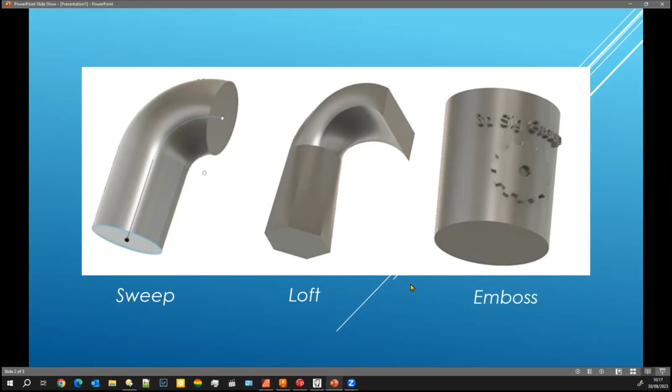We'll look at the sweep command first in Fusion - the sort of thing you'd have on a duct of a ship, or that you could use creating pipe work. The idea is we're going to create two circles, one at the bottom, one at the top, and join them together with a sweep command. We'll put the first circle on this base plane, and the second circle has to go at right angles to it.

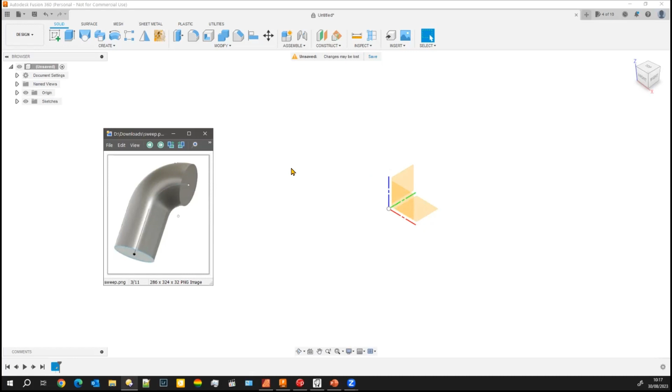Let's move back into Fusion. The first thing we'll do is put our base circle in place. I'm not worried about dimensions. Now, of course, we want this curving up that way or whatever way.

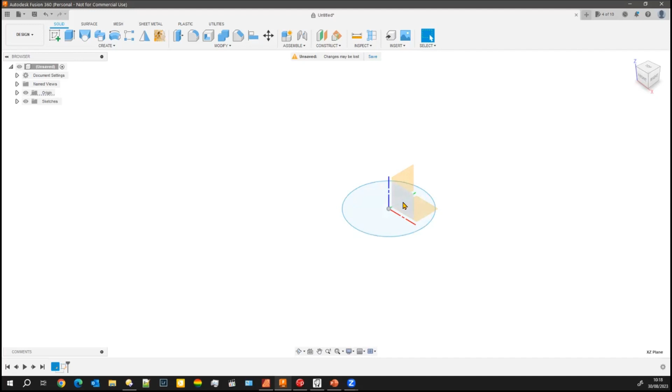So the other circle we want at right angles to this one, but we can't use this sketch plane, because if we use that plane and draw a circle somewhere on it, up there - you can see the two circles - there's no way you can then create that shape with the two circles in that position. We need that circle moved over.

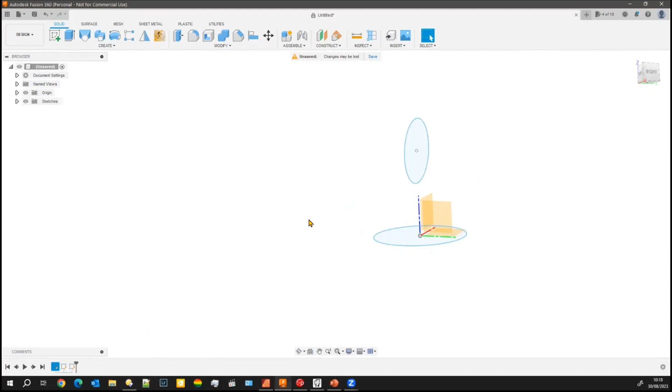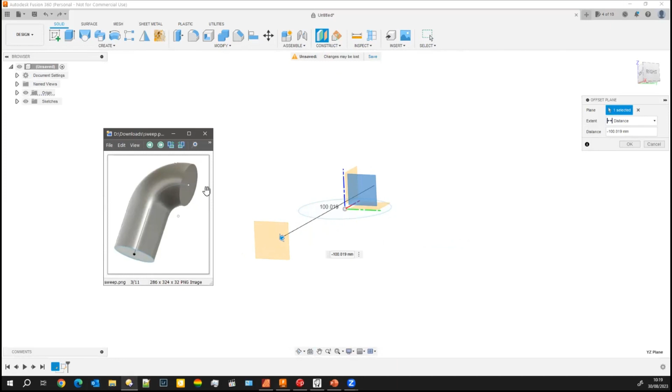So let's go back to our basic circle. What we need to do is create this other circle on a plane that comes this way - we're going to construct an offset plane, offset on that one, and pull it over here. Normally you'd need to work out the distance between this center circle's plane and where you want the edge of the new plane to be, but I'm just guessing at the moment. It's come out at 100.

Then we click return, so we've got that plane. Click on sketch, click on that plane to sketch on it, and then we can put our circle wherever we want. As I said, I'm not interested in measurements. There's our two circles. Now the question is, how do we sweep from there to there?

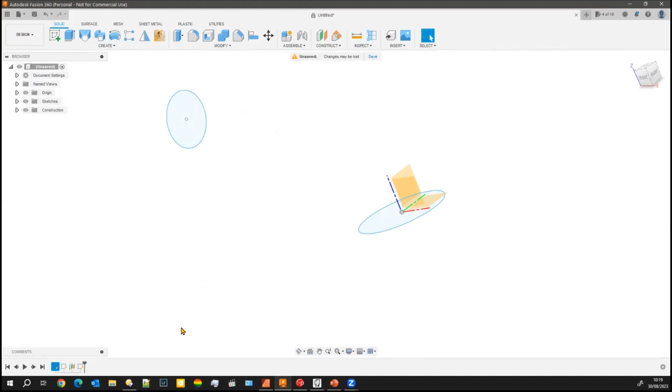What we've got to do is put a line in - the path we want to follow has to go from there up. Let me get rid of that first circle a minute, since we don't really need it at this stage. I want to sweep on a path, and the only way this can sweep is up or down, so therefore the path has to be on this plane.

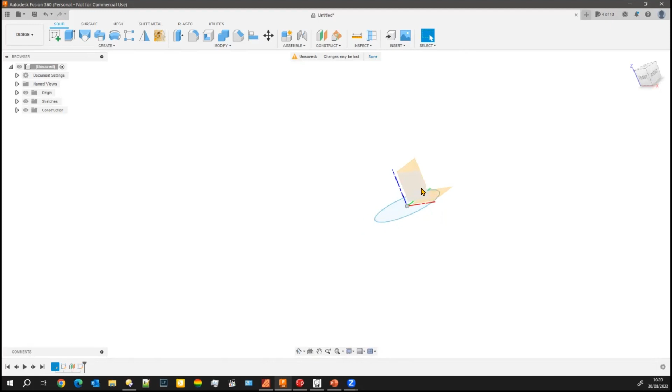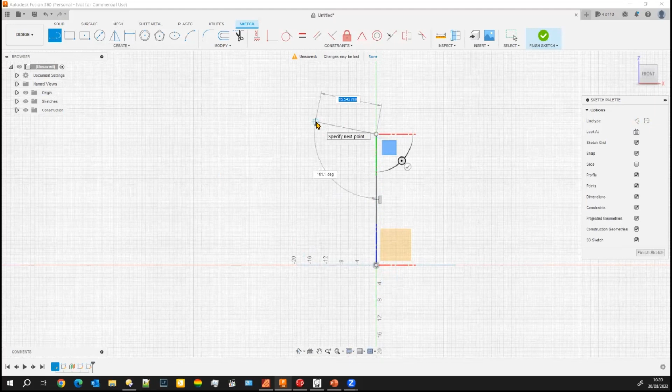Let me zoom in a bit - that one there. So we're going to go down, click on that plane, and then draw our path up. Hit the center point, that might be a good idea. And then we're going to put a curve in there maybe. Let me move my thing, otherwise I can't get the curves here.

And then we'll add a bit more to it by adding another line down here. You can have whatever shape path you want. So there's our path - finish our sketch.

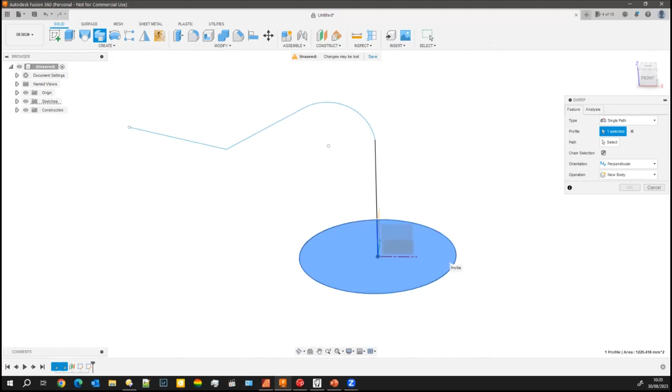Now we're going to use the sweep tool, that one, sweep. We click first on the profile, which is there, then select the path, which is there. And then we get an error message, because we've got a right angle here - it doesn't like right angles.

So we'll go back and take that one out - sketches, edit sketch - and take that one out, and I'll take that one out as well just for good measure, and hopefully that will now work.

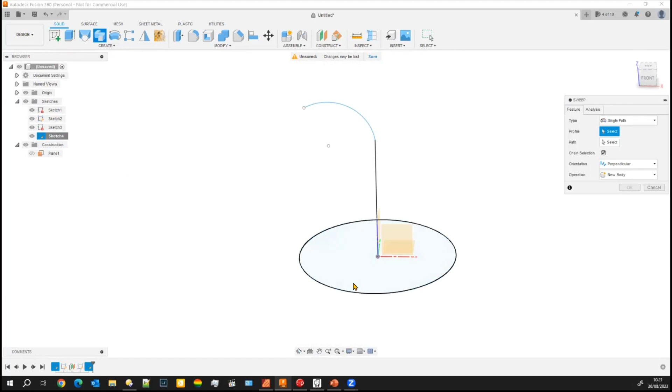Sweep again, click on that one, select your path there, and we still got an error. Oh, an error's there, hang on a minute. It's good to get errors because then you can see where you're going wrong.

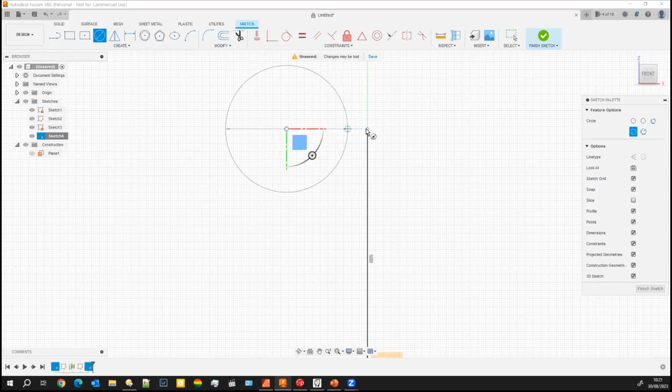So what I'm going to do is put a circle in there for a better join. And then I don't want the full circle, so what I'm going to do is cut a line across there, and I can use my scissors command to remove the bits of the circle I don't want.

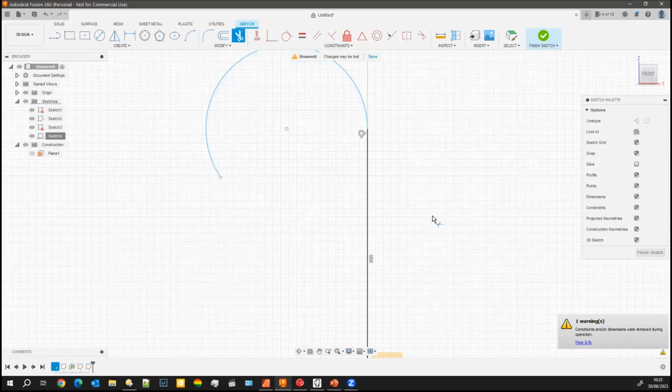Hopefully this time it will work. If not, we're back to the drawing board again. Under the sweep, select it, select the path, and there's the shape that we've got.

Questions, anybody? No, all quiet on the front.

Well, I'm assuming that if instead of having the two things meeting on a curve, you had them meeting at a right angle, you'd have a path of a right angle and probably a different command. Is that right? Yes, because that's an intersection then. So you would treat that as two separate sweeps and intersect them. Okay, that's fine. Sorry about the stupid question. No, that's fine, Hugh.

So is everybody happy with that straightforward thing? Now the sweep can also - you mentioned about the second plane, where you knew where two holes were, or two at the start and end position.

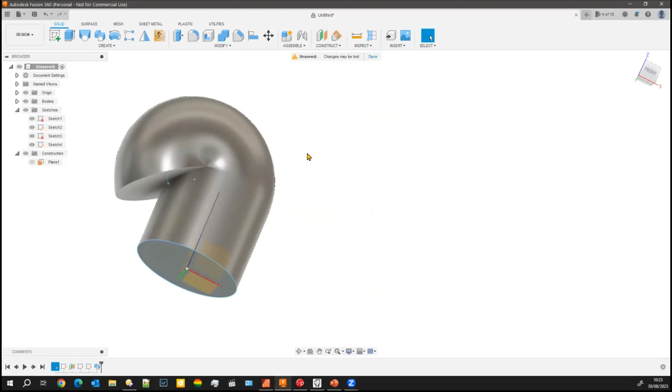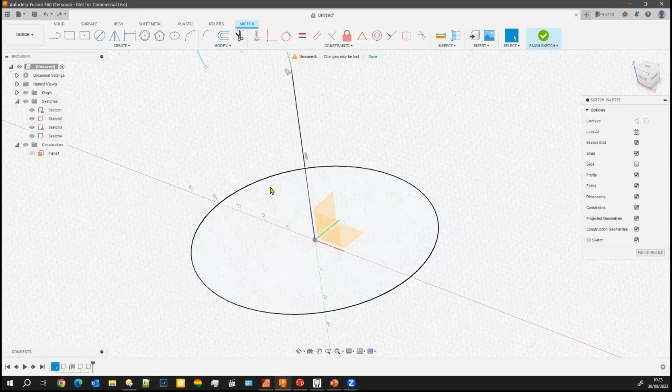Okay, let's go back and look at the planes for the moment. Now, with this particular one, the profile is on this bottom plane there. Now, because the shape, whatever shape we've got, can only go up or down in one sense to get going, then you need a path either on that one.

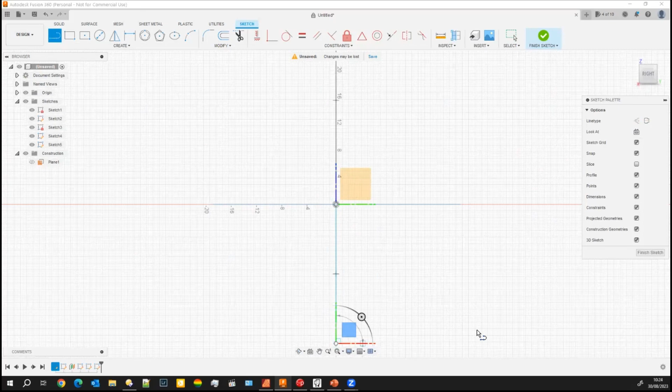And if you path on that one, it takes it up and around that way. If I wanted it the other way, for example, I could draw a path on that one instead. Let's finish the sketch, and I'm going to draw on that one instead. I'll just draw, going down so we don't get confused with it.

Now what we can do with that one, and I haven't put the curve in for saving time, is go on the sweep command, highlight it, then select our path, and down it goes. If we select that path as well, then it goes both ways. So you can see how you can create a fairly complex thing.

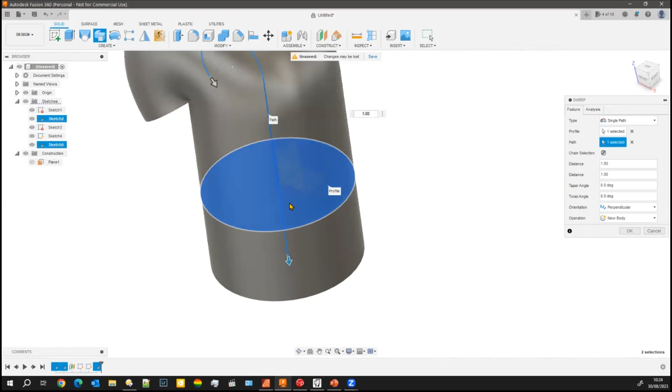Let me quickly show you another one over here. So if we go into sketch mode and go on there, I'm going to put a square in there now, like so, okay?

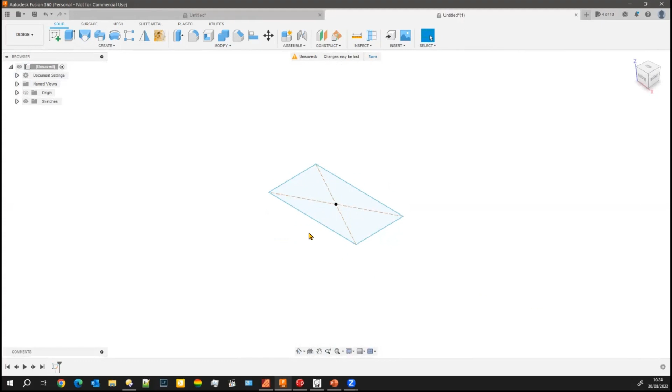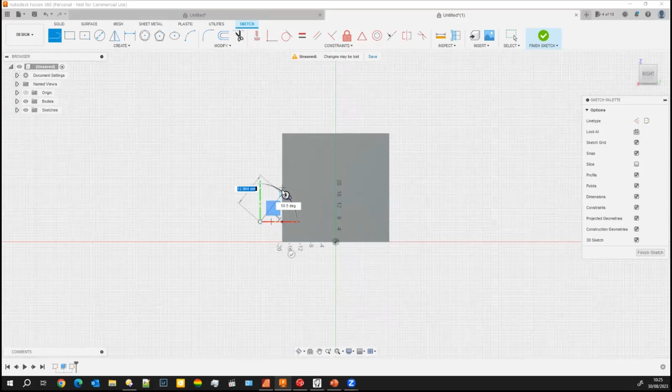Now what I want to do - this is a building, if you like - so what we can do now is extrude that up. And then I want to put a sketch on this face, there. I'm going to keep this quite simple and exaggerate it so we can see. Oh, don't forget to actually close it.

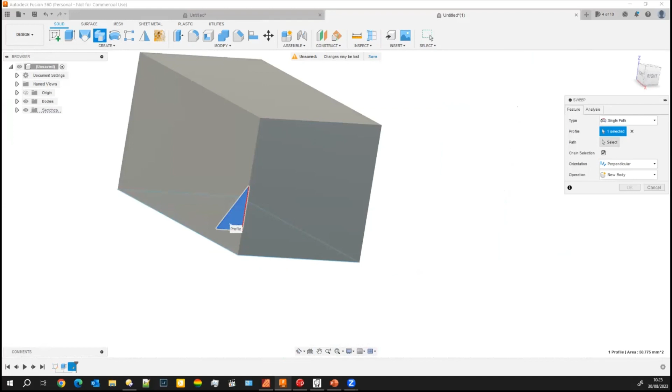So now we've got a profile there. What we can do now is highlight that profile, go into sweep mode, it's selected, and then select a path there, and it goes all the way round.

Now, very simply, if you can imagine I'd have copied that profile up this edge and shaped it a bit better, that's the quick way I put lap wood onto a building. Because you would just copy that up, click on them, and then use the sweep command to go all the way round.

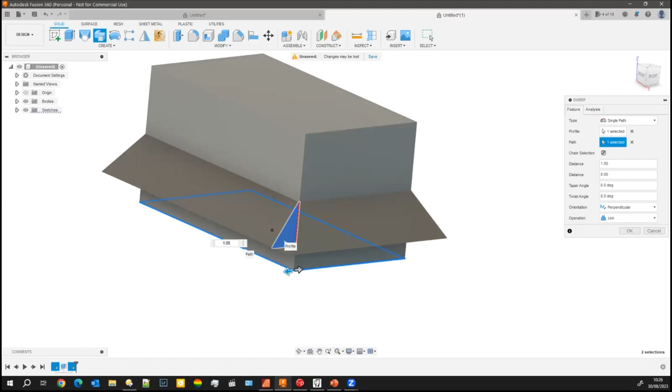Does that make sense? Yeah. Nod or fingers up or whatever. Okay, so that's the sweep command.

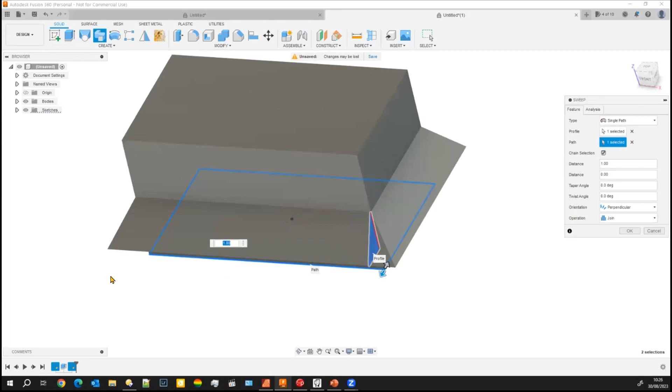It's very useful, as I say, but the one thing you have to make sure is your path is continuous. If I'd have drawn that original box there with 4 lines, then it may not have worked, because that was the problem with the other one.

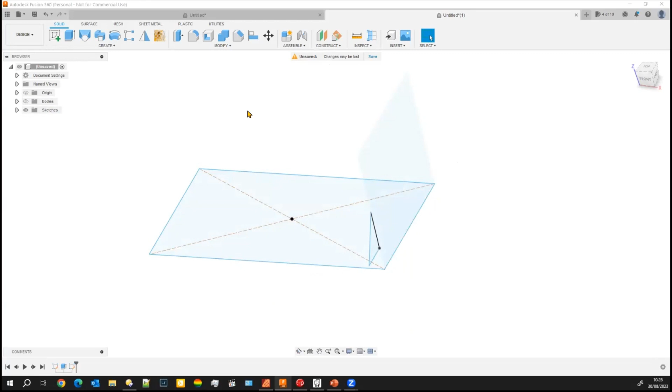So when you sweep into a path, the path must be a continuous path, and it's easy to run into the sort of situation you could have. Suppose I'm going to draw a line there, okay, and then I'm going to draw another line.

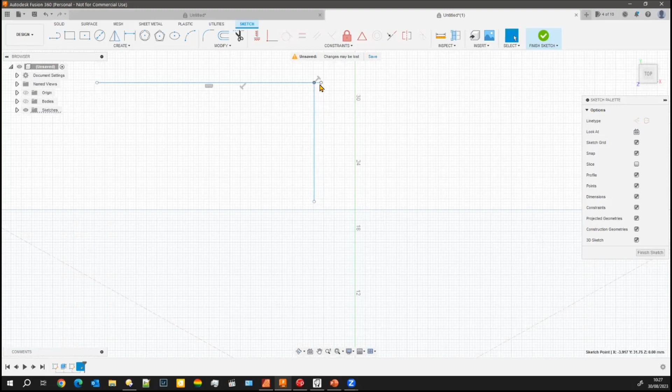Now I've exaggerated this, but I've not joined them. You can see how you could easily draw a second line that really is not joined fully to the first one. And of course, it's not a continuous line, so the sweep is not going to work.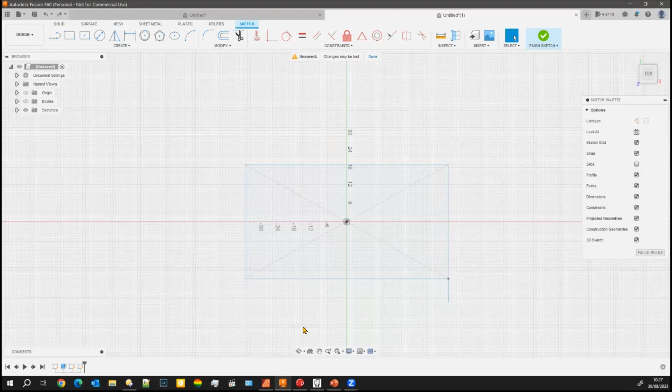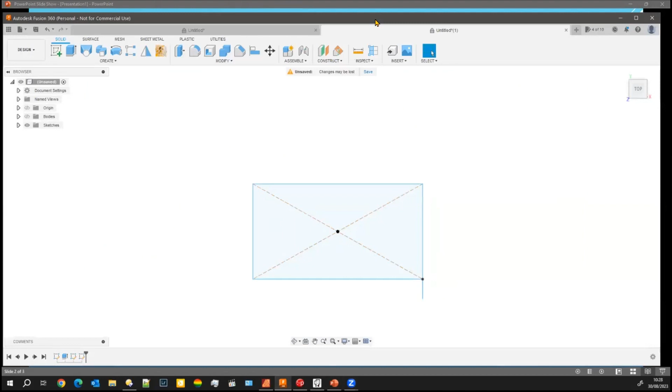Do you see what I mean, Roger, or not? Not quite, no. Okay, let's go back one and see if we can see what the error is with it. Hang on, it's a perishing nuisance having this. I can't see the top of my screen here, because the Zoom thing is up there.

Let's see where we're going. Go back on that one. Now if we go onto that one, click on there, and sweep and path. It did it, that one. Okay, now what I'm saying is that what we'll do is we'll undo.

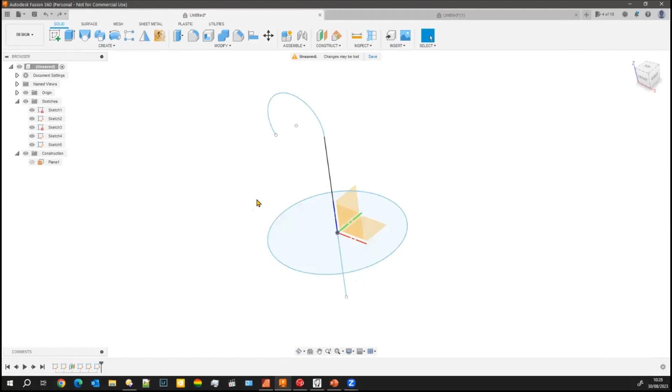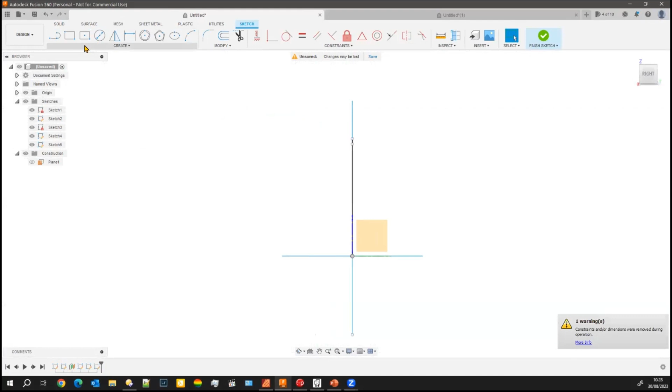Let's go and put our wrong one. So we're going to add to that line. I'm going to do a tangent off there first of all, then delete that. Finish the sketch. Sweep. Whoops, lost it.

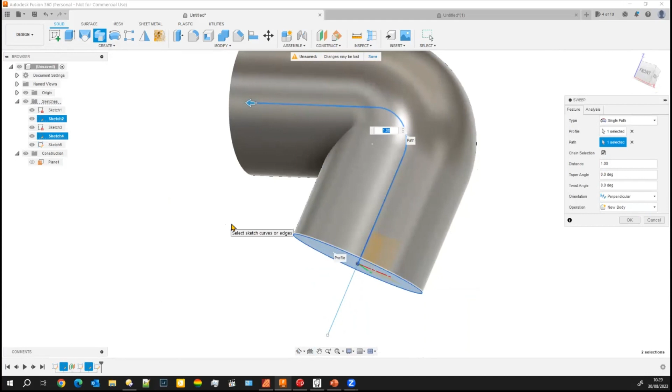Now I did it that time because what I did, I put too tight an angle on here at the end, and it wanted to fold back on itself. Now when it wants to fold back on itself, it doesn't like intersecting itself.

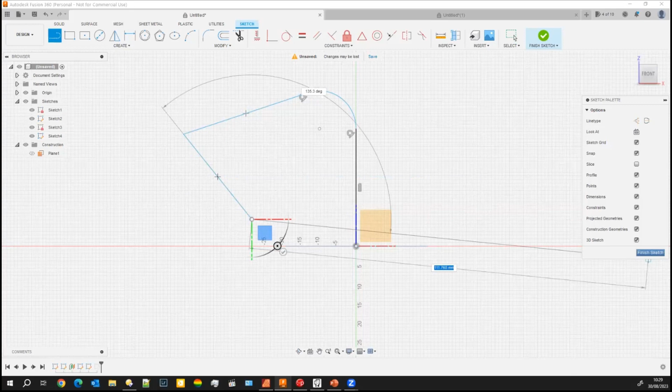So if I was to put a line, let's see if I can show you what we mean. If I now add a line in there, I wouldn't expect this one now to work. You see, the sweep could not create a path, and that's because it's coming back and intersecting itself.

Because if you can imagine, when we did the first sweep, that went up there like so, and this face then was on there. Do you follow me? So what we were trying to do was to take it back on itself, and it doesn't like that.

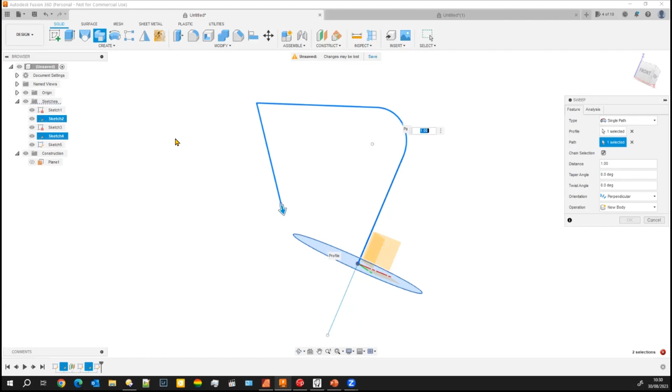So if you made that sweep from the edge of the circle, not the center of the profile circle, would that work? If you made it, or if you've done the profile from the edge of the circle? Yeah. Possibly, yes. Let's give it a try, shall we?

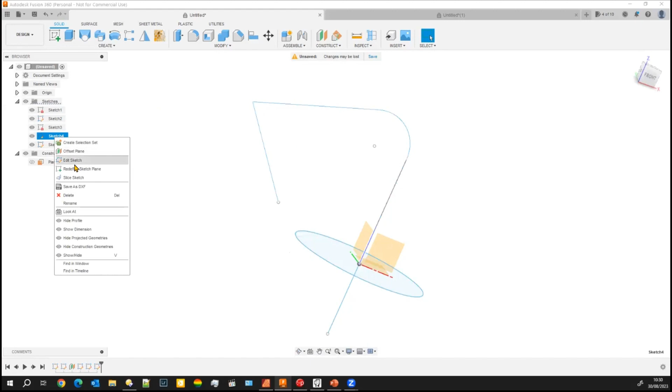Let's go back into that sketch then. Edit sketch. So we'll take that out. Let's take them all out.

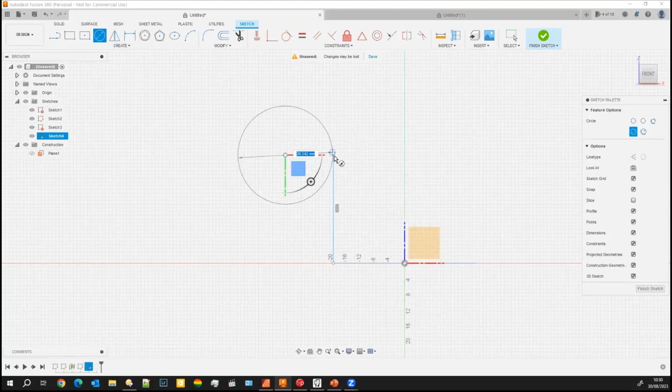And what you're saying there, Roger, is if we take our line from the edge, which is there, up, and then we'll put a circle in there. And then we'll put a line there. And then we'll delete the bits we don't want, if we don't want that bit in the middle. And finish the sketch and see what we get now.

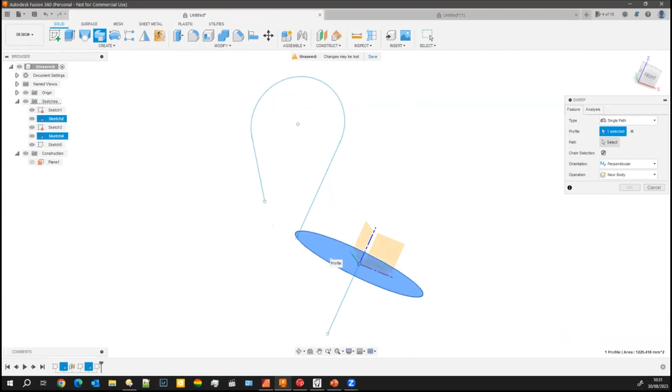So now if we do a sweep, highlight that and highlight the path. I haven't got a complete path there. So you can see the problem, which I just mentioned about the joining issue.

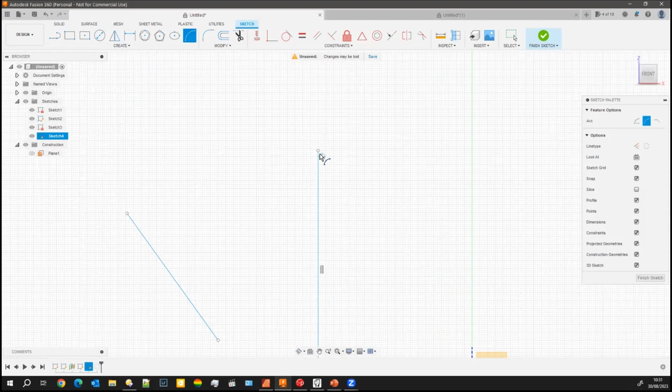Let's take that back out again, and instead we'll put an arc in there. Okay, make sure it's joined. Sweep onto there, onto our path. Whoops, missed it.

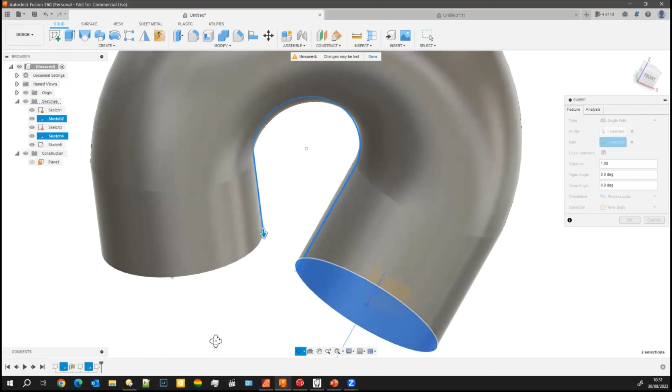And now you can see, you end up with a shape which is better because, as you said, Roger, before, we were taking the center line. When the center line comes up here and it was trying to go back, so it would have gone, if that's the cut mark, it would have gone back and tried to go over itself, which it doesn't like doing. Does that make sense to you?

Yeah, got that. I should have, perhaps it's a good job you asked the question, because it does show the point that the path does not necessarily have to be at the center of your profile. The path can be anywhere.